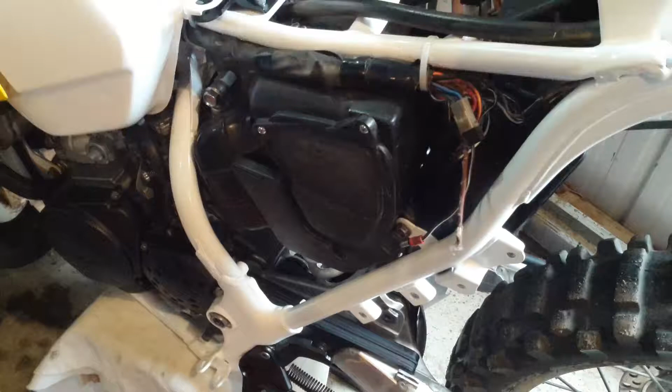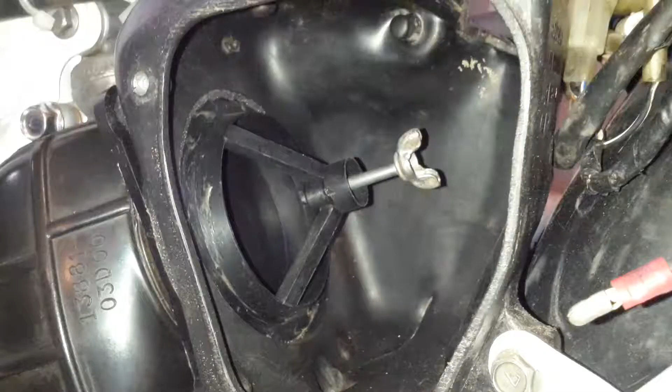Today's project is going to be a high performance air filter for the TS200R. I'm going to design and 3D print a custom filter frame. However, I think I'll go with just a cylinder shape instead of the dome, as I think that would be best to get the most surface area.

Okay, so I've taken some measurements, so now I'm just going to go inside and see what I can come up with. Okay, so this is what I've come up with from the measurements.

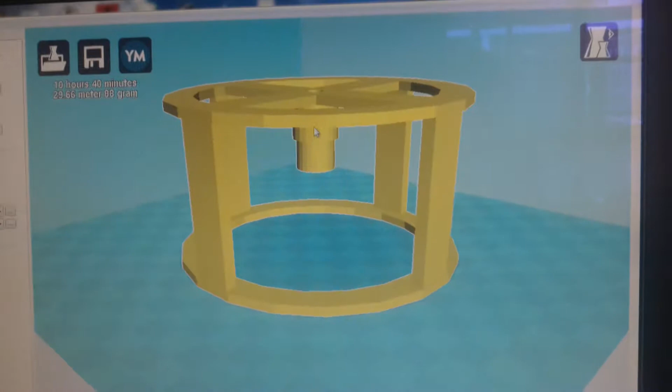As you can see, it's got a base to clamp the filter against the airbox. This standoff here inserts into the standoff inside the airbox. Essentially it's a spacer to stop the base of the filter cage from clamping all the way against the airbox, because we still need about 5mm or so of room for the filter foam to sit under.

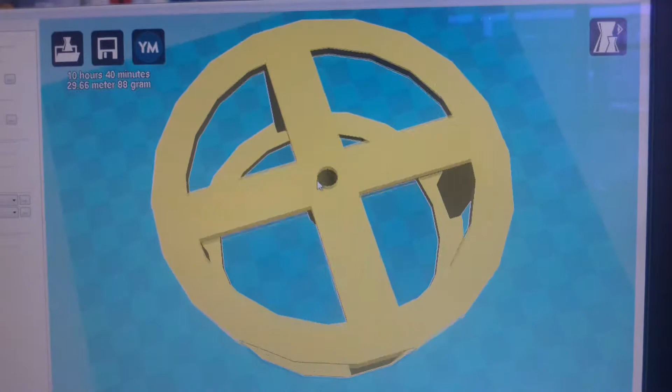It's got the hole through the center for the wing nut and stud to clamp everything down. So without further ado, I'll get this in the 3D printer and we'll get things going. And now it begins. Something like 9 more hours of this and we'll be done.

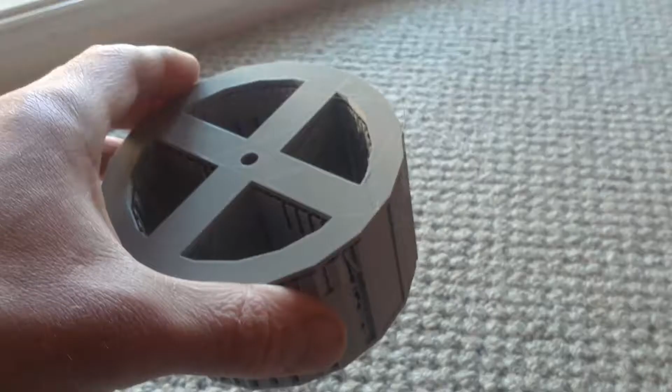Okay, so here it is fresh off the 3D printer. I've taken the base plate off already, all I have to do is remove all the rafts. And here it is rafterless.

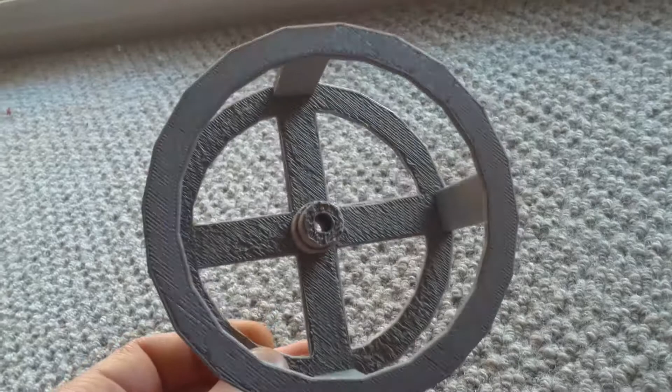As you can see, it could have done with a few more hours of printing, but I preferred 9 hours as opposed to something like 48. It's still strong enough to do the job it needs to do.

I'm going to clean off all the little bits and pieces that the rafts have left behind, because I don't quite like the idea of little bits of PLA bouncing around inside my crankcase and cylinder.

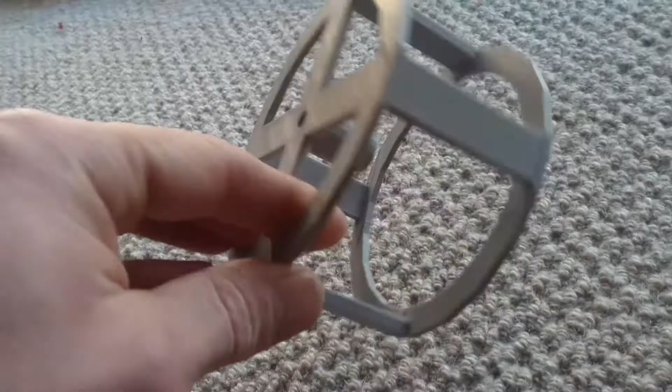If anyone's curious, yes, I have used PLA to make an air filter cage before, and no, the oil hasn't attacked it. Might be a bit different with a two-stroke that generally has a bit more fuel coming back through the system, but I'm confident it'll be fine. If not, we'll find out soon enough.

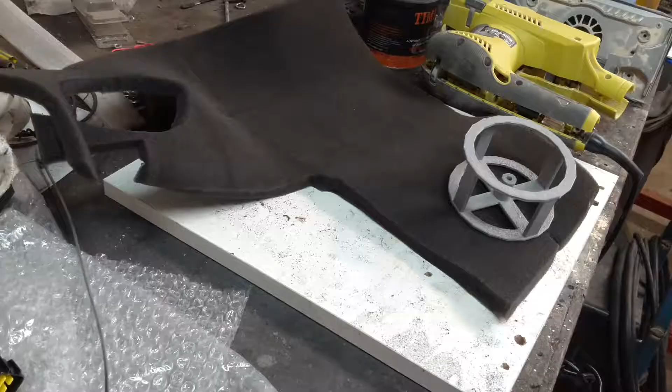So now I'll take this out again and I'll make a filter element to suit. Nothing special to talk about here, it's basically just a cut and pasting activity.

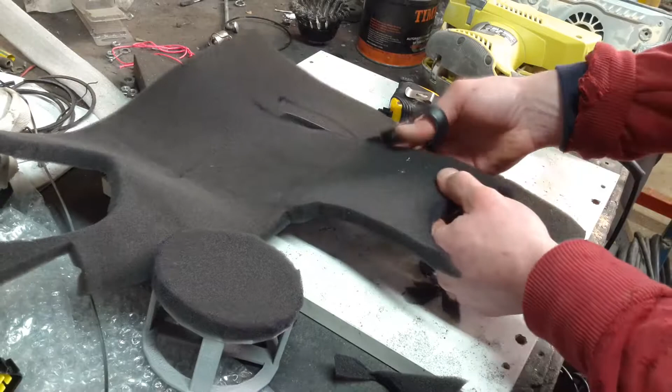So now we just need to do the hard part, which is, I guess you could say, the ring around the bottom.

Looks ugly now, but it'll look much better once everything's glued together.

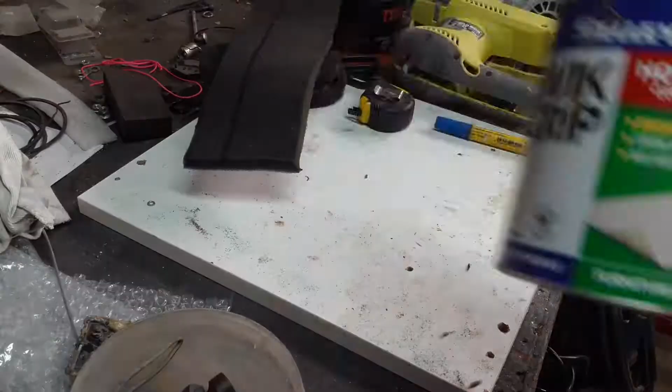So this is what I use for gluing. I've used this on a filter in my XR400 for quite a while now, and it's probably about 6 months in and it's still going strong, so at least for me, this should be suitable for making this filter out of.

A lot of older air filters I find are usually sewn. You don't have to worry about glues coming apart over time or anything like that. But I'm not that worried, so this is what I'll be using.

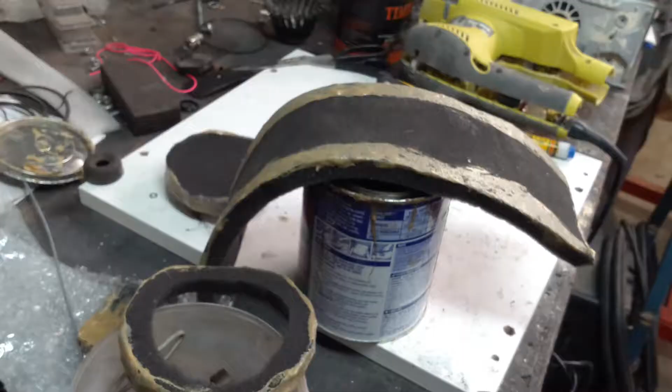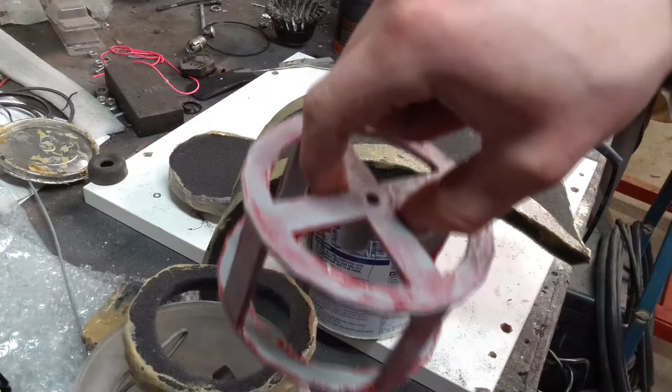Watch it glue itself to the bench now. The camera battery went from 80% to 0% while I was doing things, but what I've done is covered both surfaces and let the glue go tacky. I've also coated the frame in grease so that when I form the air filter around it, hopefully the glue doesn't stick to the frame itself.

Apparently you only get one shot at this, but I've removed it, separated it and put it back before, and it seems to be alright, so you gotta do what you gotta do, as long as you don't pinch it hard. Okay, bottom's alright, and the top looks pretty good, so I'm now going to pinch it hard.

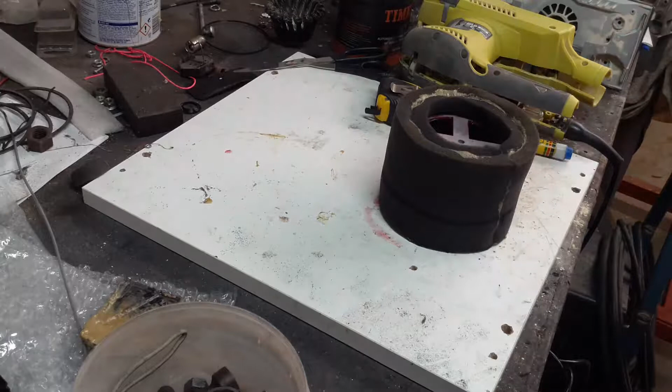Yes, the air filter is on upside down on the frame. I plan on removing the frame and then oiling the filter element once everything's dry, so really we just need the cylinder shape. Now we just need to wait 24 hours for the glue to dry completely, then I'll remove the frame and oil the air filter as necessary and we'll go from there.

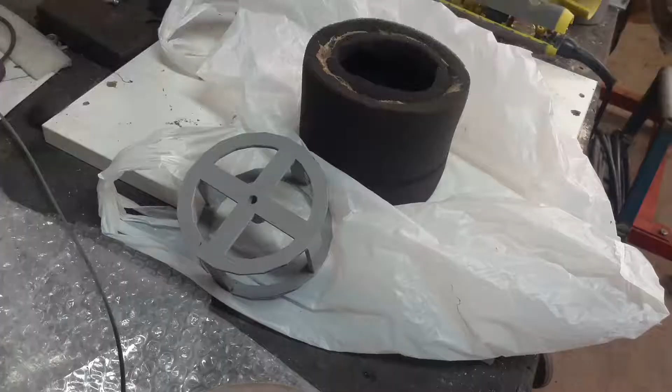Okay, so 24 hours later, the glue's dried, there's no smell to it anymore, and I've removed the filter element from the frame. So now I'm just going to wipe the grease off of the frame and give the filter element a bit of blowout because of the dirt it may have picked up off of the workbench. Lately I've been using High-Tac bar and chain oil on my filters and it seems to work just fine. As you can see, the contact adhesive holds up just fine.

Okay, so it's all uniform now, and it seems to have plenty of residual oil. I don't know if you can see that.

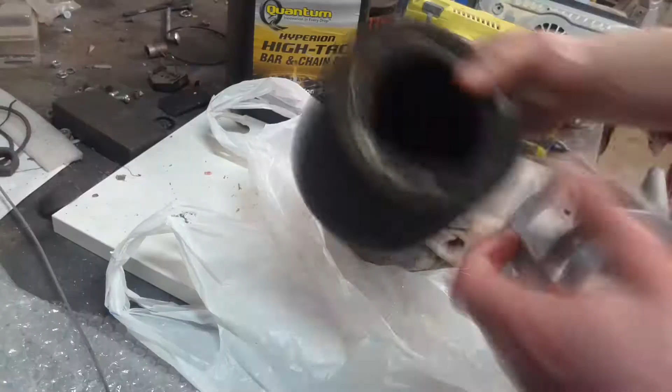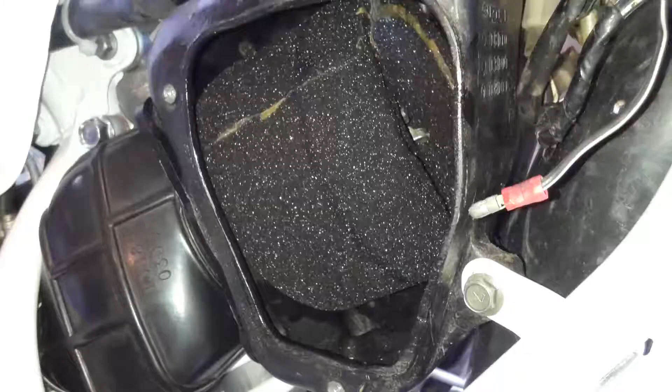There we go, one air filter. And just like that, it's installed and almost ready to go. As you can see, the foam is pressed up against the base of the airbox, so it should be right for sealing. I put plenty of oil around the base, so there should be a good seal between the plastic and the foam.

I have ordered the proper plastic washer that Suzuki supplies with the OEM air filter, to go with the wing nut, but for now I've just got it installed the way it is. See it from the port in the top of the airbox?